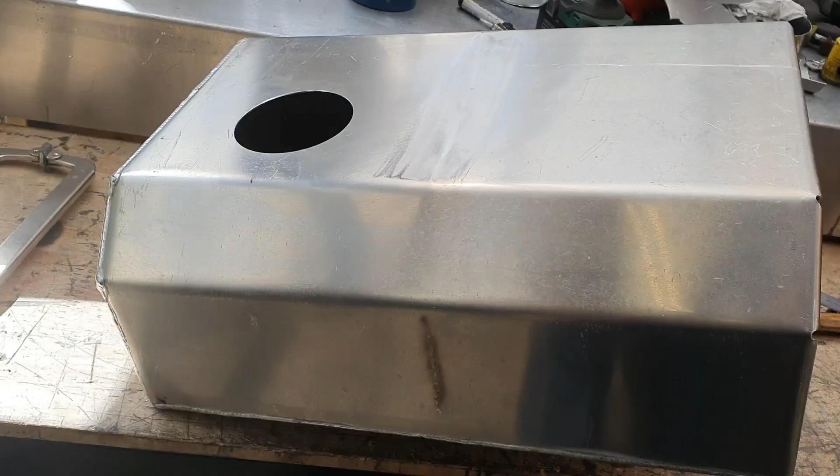This morning we're still working on that fuel tank I was making for this thing here. I'll show you where I'm up to. Some funny marks on the outside - why? Oh, because I welded something from the inside.

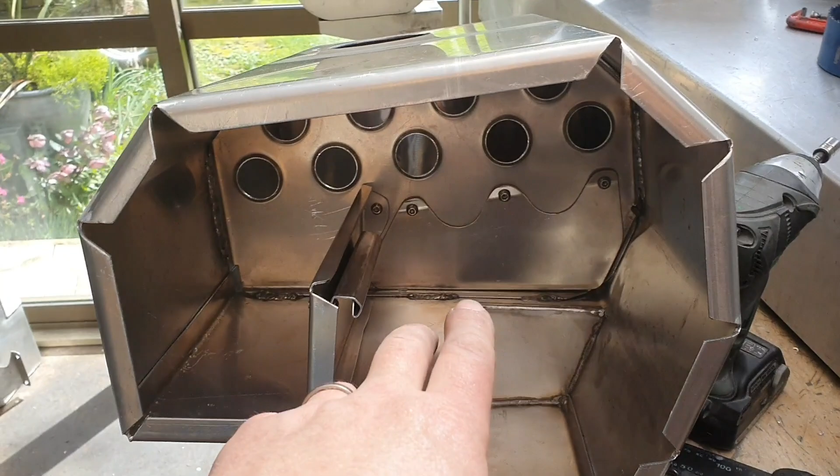Baffles - only two really. This is our main baffle, which is the one I showed you in the previous video, with our little one-way valve arrangement here, which some people say will never seal properly. It's not designed to, okay? I don't expect that to seal 100%. That's just for the bulk of the fuel that's sloshing around. It'll do a reasonable, effective job.

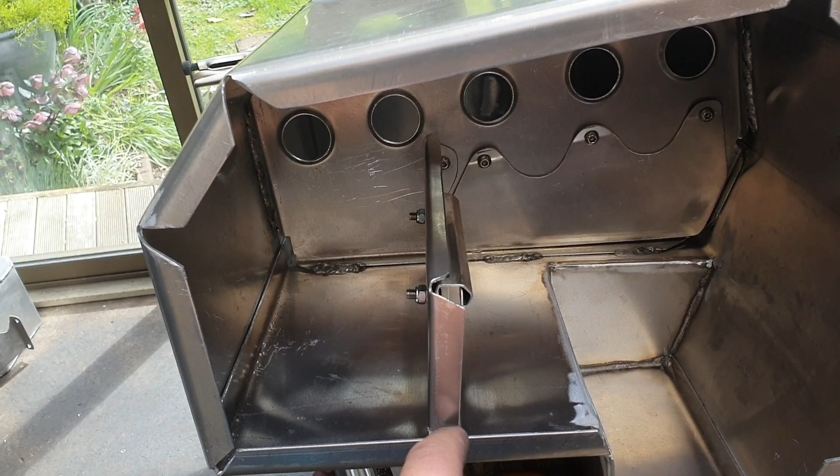Same deal with this one here. This baffle is actually on an angle. When that goes in the car, it's actually leaning back, so the top of it is behind the bottom of it, and the reason for that is any fuel that's in here under braking, I want to try and minimize how much can slosh out.

So we might have that much fuel in there under quite hard braking, so we've still got some for the surge tank here. And then I wanted a check valve on that one as well, just to try and catch what's in here, what does go over there. I want it to get back to there as quick as possible.

So I built a check valve with a counterbalance on it, so it will stay closed when we want it to. Because if we didn't have a counterbalance on there, it would want to hang straight down, which wouldn't seal. And of course, if we just folded that out flat, then when the fuel comes up here it's going to push against that and push it open. So I reduced this by folding it around, so we've still got the weight we need with minimal surface area up here.

I mean, you can do that sort of thing with rubber flaps as well. They'll work far more efficiently, and you can seal the corners and everything a lot better than what I've done and get a better result. Or you could just have - one suggestion was - 4 fuel pumps and run them into a surge tank and take a main pump from there, or 2 main pumps from there. But heck, I want to try and keep things simple, as maintenance free as possible, and keep the costs down and keep it light.

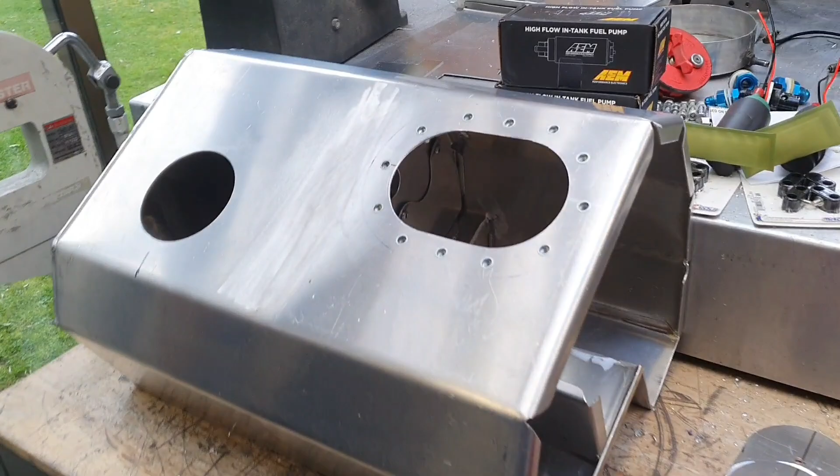It's getting a bit late in the day. Not sure I'll get too much more progress done on this today. So,

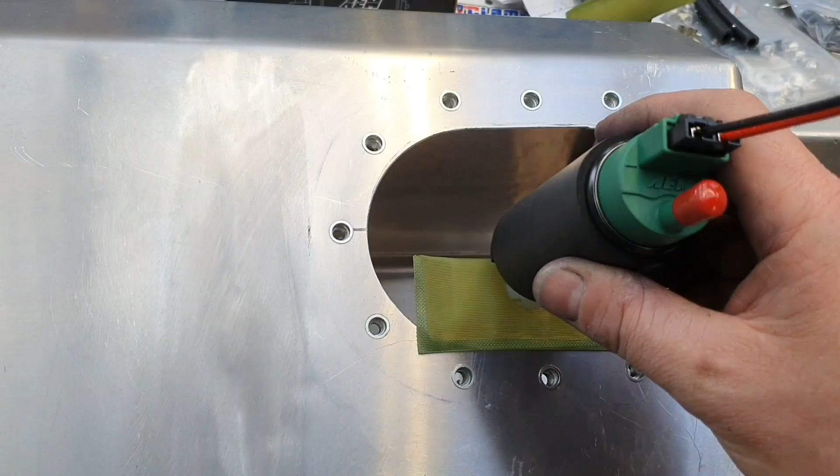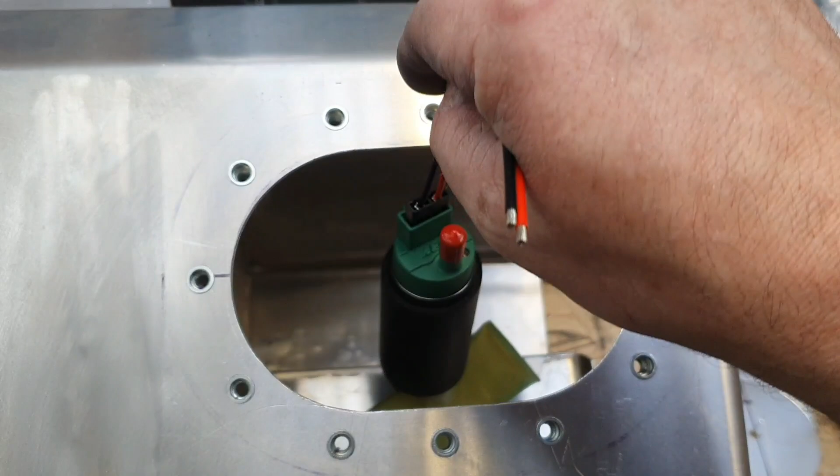There's a few options - spend some money or make some things. You shouldn't pick up things like that by the wires, but these pumps don't weigh very much so that's okay. Popped down the road and got some 4mm thick aluminium.

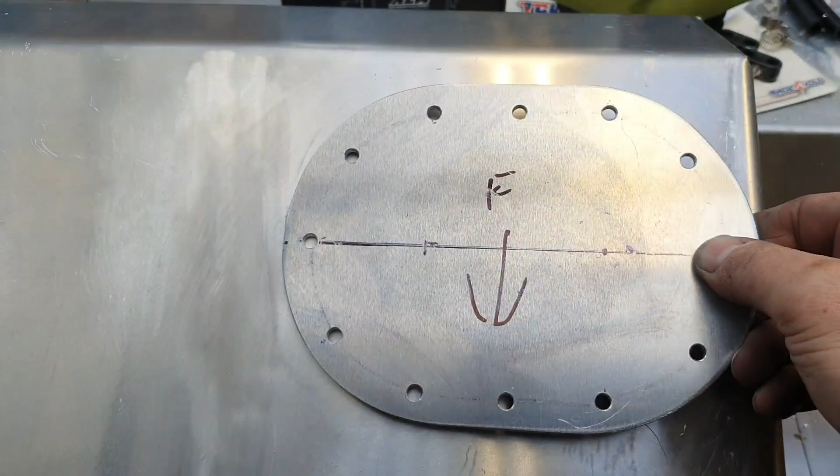So if we put that on there like that and did some screws up, that would absolutely leak like a sieve - there would be fuel everywhere. If we put some fuel-proof sealant on here, might be okay. What I'm going to do is use a gasket.

Because I've used rivnuts or nutserts or whatever people want to call them, the fuel is going to get to the thread and come up the thread past the screw, and come out under the screw hole. So what you have to do is put a fiber washer under the head of the screws, although I'm thinking I might want to run countersunk screws on there.

So that kind of sorts out that plan. We might have to pop an O-ring in the top of the nutsert and do it that way, and that'll work. That'll be enough, or use fuel-proof grease in the nutsert - that'll absolutely work fine.

I've got to figure out where I'm going to put our fittings to get fuel out of here. I haven't got them over here so I can't show you right now. I'm going to put the fuel filters up here - well, that's what I'm thinking. I need to make sure they actually fit. They might not go there, they might go on the panel over here, and I can't show you because it's up there.

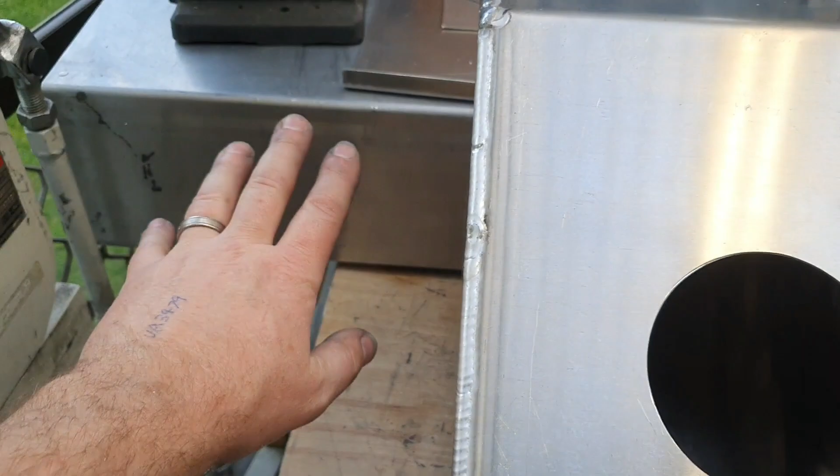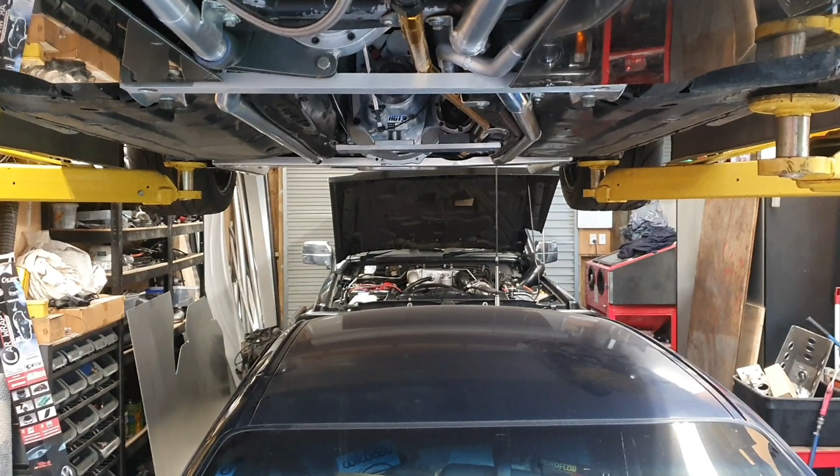Progress report on the patrol - I've sorted that, I've rebuilt the master cylinder. Funny, you can see the master cylinder from here, can't you? A big white thing right in the middle of your screen back there. So I rebuilt the original factory master cylinder and we're good as gold. That's resolved, it's all working. What a hassle, but never mind, it happens.

It says 3 o'clock, but honestly it's dark and gloomy like it's 4 o'clock. I might get more done than what I said I would.

I'll make some brackets and stuff. Let's do the bracket first. We figure out where the bracket goes to hold the pumps, because the fuel fittings can go almost anywhere, whereas the bracket's going to be quite specific and have to do something quite funky. It's going to have to start here somewhere and work its way a long way down to our little sump down there.

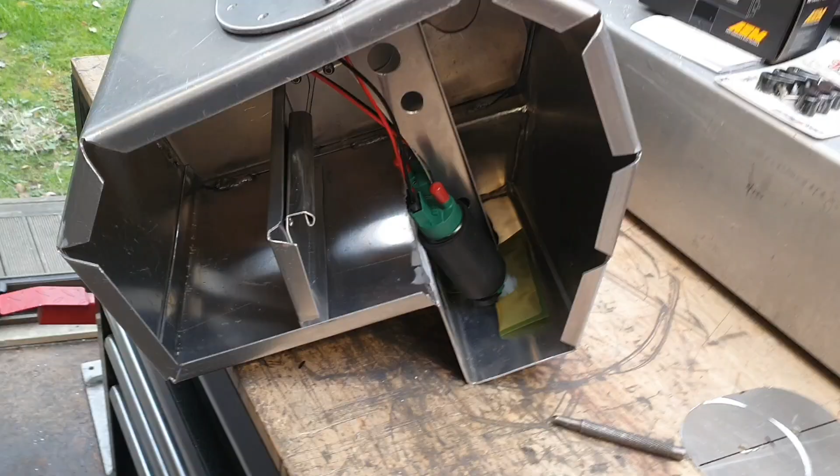You liar! I just said a couple of seconds ago in the previous clip that it feels a bit later than that. It's 4 o'clock - that's running an hour late. Liar, liar.

That's the basics for the bracket, kind of sorted out. I have just bolted that on there. They will have fibre washers under there to seal them, or I'll just do them up and the aluminium will basically crush and make its own seal. The other side will, not so much, with the 4mm thick panel there.

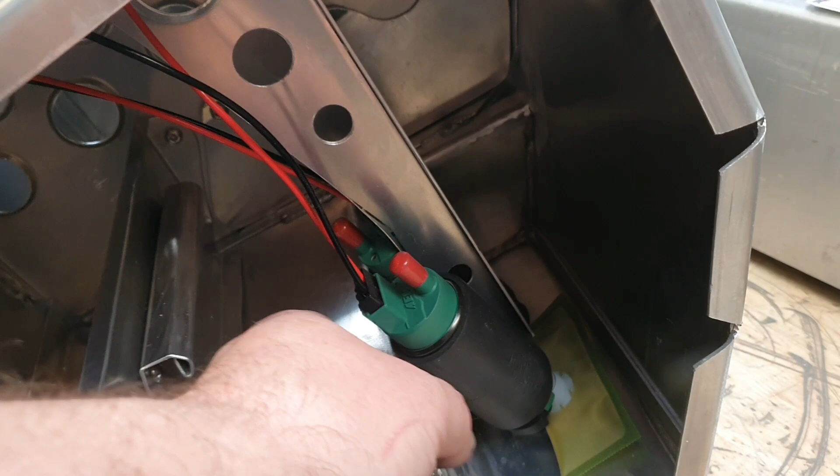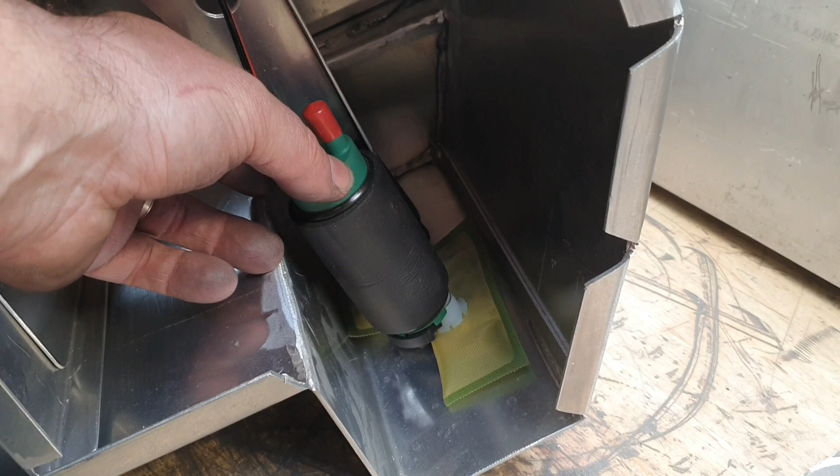Yep, you could make a fancy bracket to hold that on there - you absolutely could and there's no reason why you shouldn't. I'm just going to use cable ties, because realistically that's all we need to do. It just needs to be secured so it doesn't wander off or fall off, and needs to hold it there so when you take that panel off it comes out with it.

The next thing we need to do is - I'm not going to put the cable ties on those right now - I'll hold those just ever so slightly up off the bottom of the tank so they don't chafe a hole through the bottom. But honestly, it's never going to happen anyway - it's 2mm thick, it would have maintenance before that would be an issue.

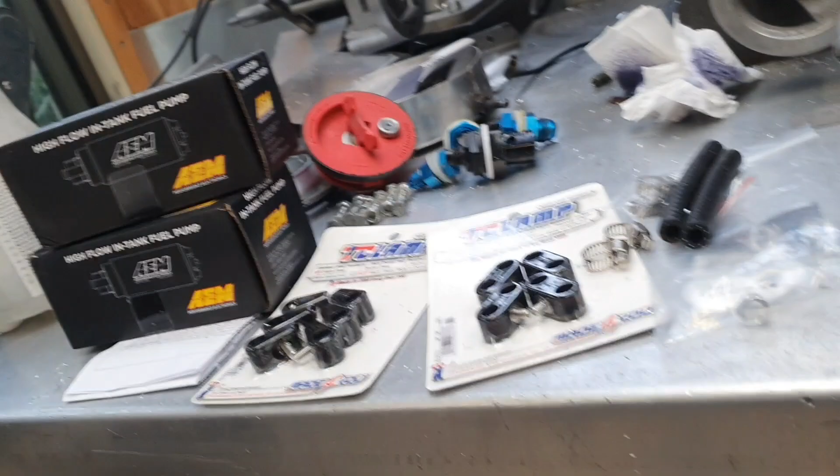The next thing we need to resolve is getting the fuel from here out here. The in-tank hose - you can't use any old fuel hose, it has to be special in-tank hose. The in-tank hose supplied with the pump is a bit short on one end, so that's no good. You can buy that, there's various different brands available.

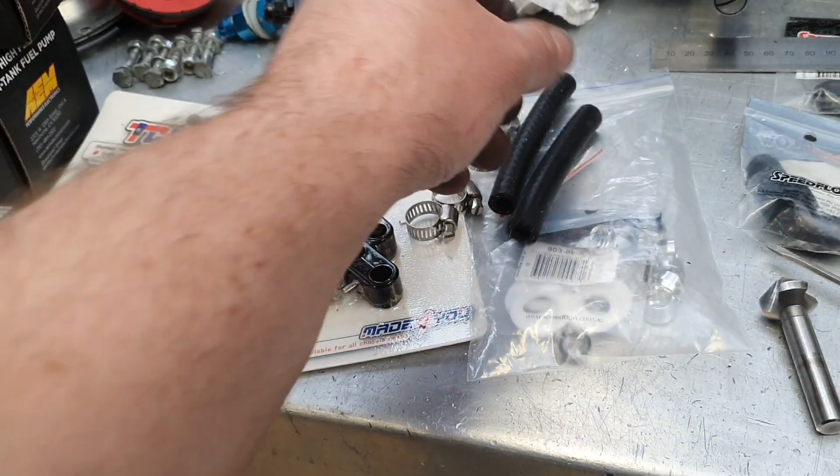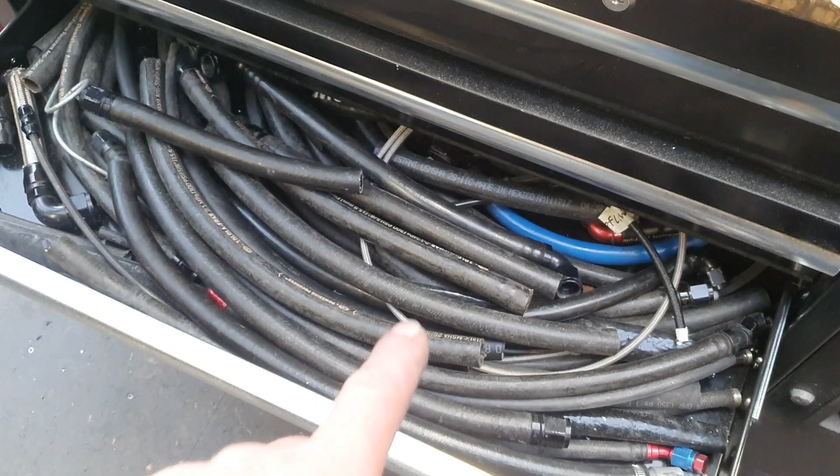It's very expensive, and it's actually cheaper for me to go into my drawer of lots of things and find some hoses we can use and make an adapter to go onto the end of the fuel pump. Just go AN 200 series hose up to our bulkhead fittings on this tank - much better and safer and more gooderer. So we'll do that. Don't use push lock hoses on E85.

No, no, no, no. Bad, bad, bad, bad, bad, bad. It's 5:30 now, I better get a wriggle on.

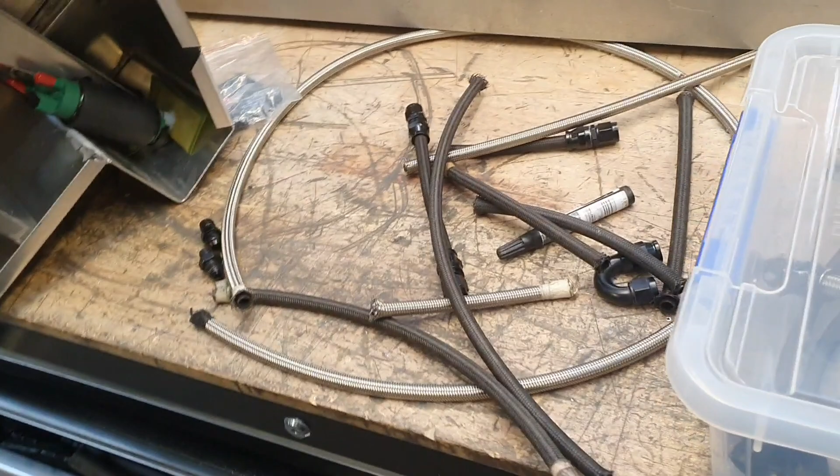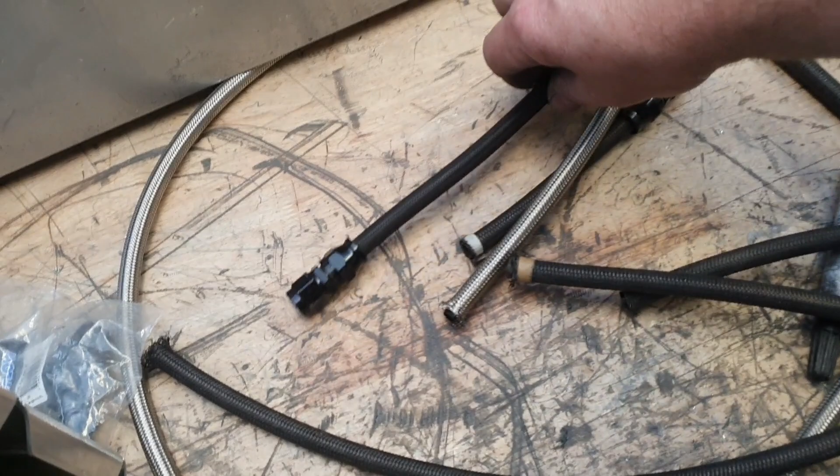So I found those bits, they were on the shelf. We're one hose end short of having enough to do what I want to do - just using stuff that was lying around. So we've got, that is probably just about the perfect length actually. Oh, sorry, terrible camera work here.

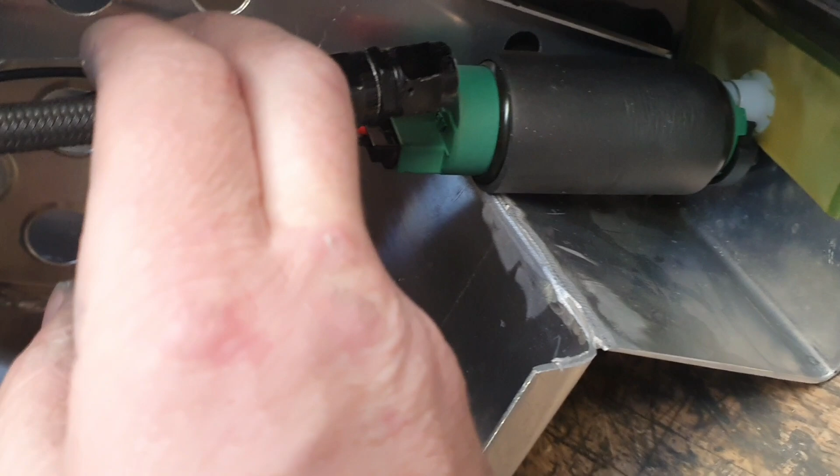By the time we have something on the end of there, and that goes up to there, that has the potential to use just like that. Put an olive in the end of there, put a fitting on there, and we'll be away. That one's going to be a bit long, so we can take that off, put a new olive in it, shorten it up, put a new olive, and be good to go.

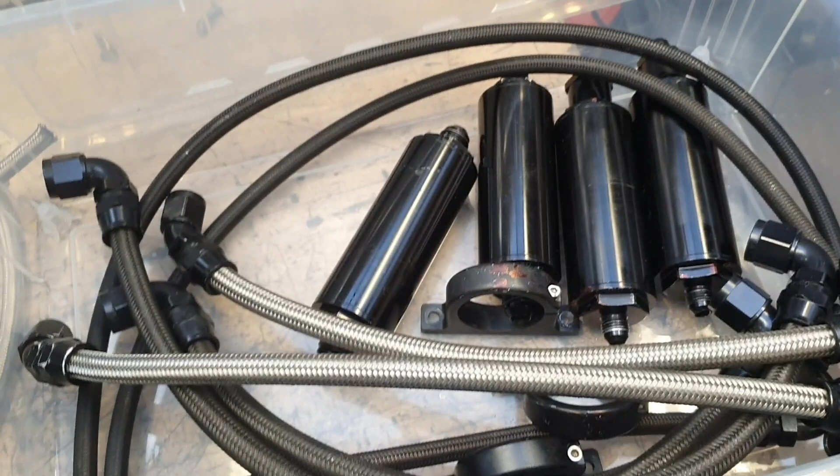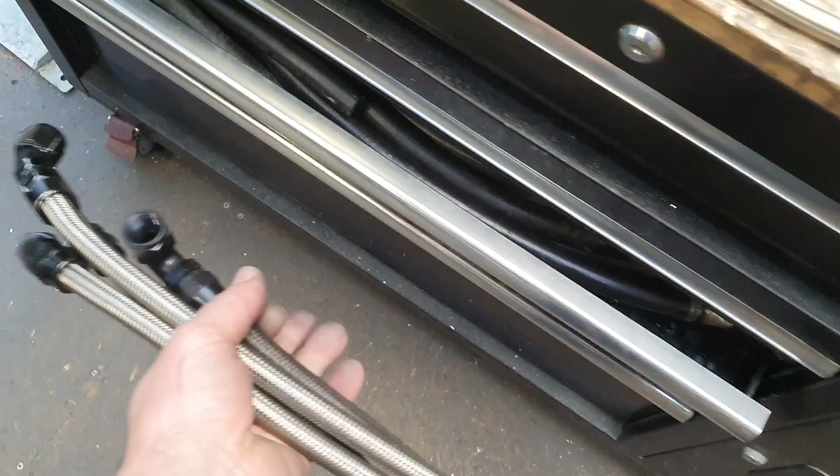Not that we need black hoses inside the fuel tank - there's plenty of brand new, not black hose. And here's, well, most of, I guess you'd say, the original fuel system. These are AN8 hoses, which we will no longer require, so we can throw those - I guess we can put them in this drawer here, which is overflowing. That's never going to close now, so there you go.

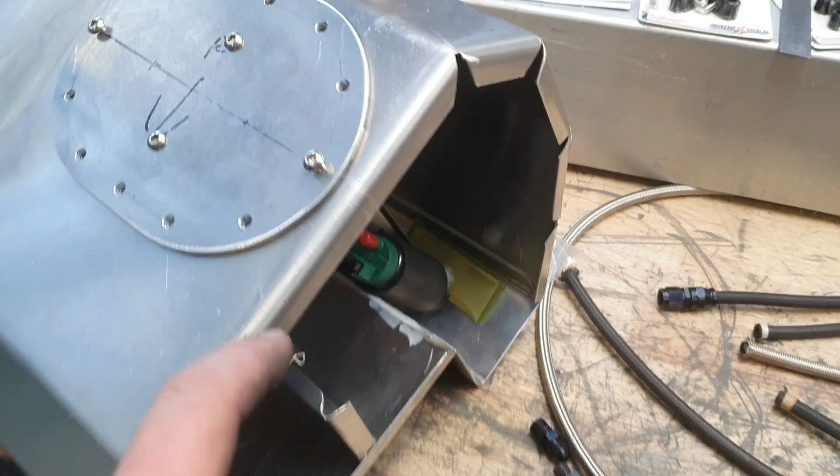And these ones here, we're going to need a couple of hoses to go from the top of this panel, wherever I put the fittings. Might as well put them over this side and have them pointing that general direction. Going to need a couple of hoses to go from here, wherever the filters are going to end up.

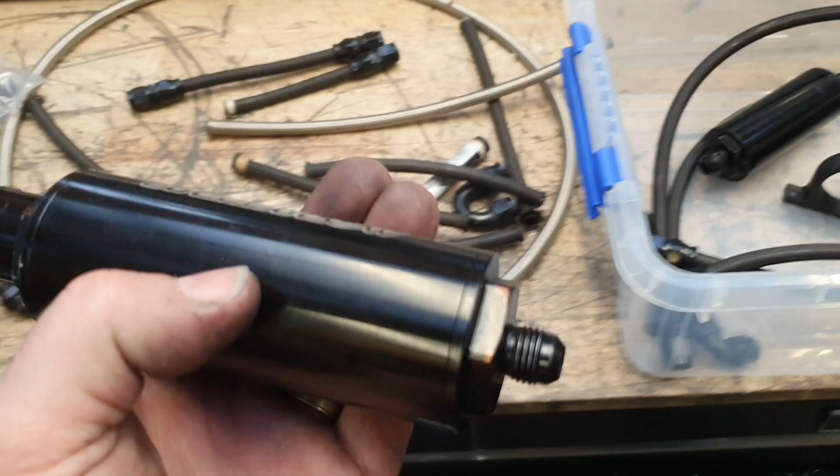Not those ones, those are the primaries. There they are, secondary filters. Which way is the check valve on that? Flow goes towards us.

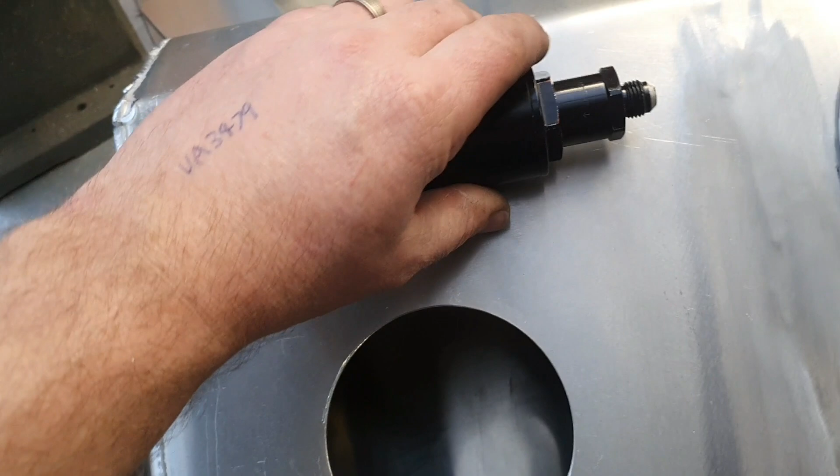They might be a bit big to put up there. Can't put them there. We'll put them down here on this panel that's down here. That way, maybe two of them side by side like that. That'll be nice.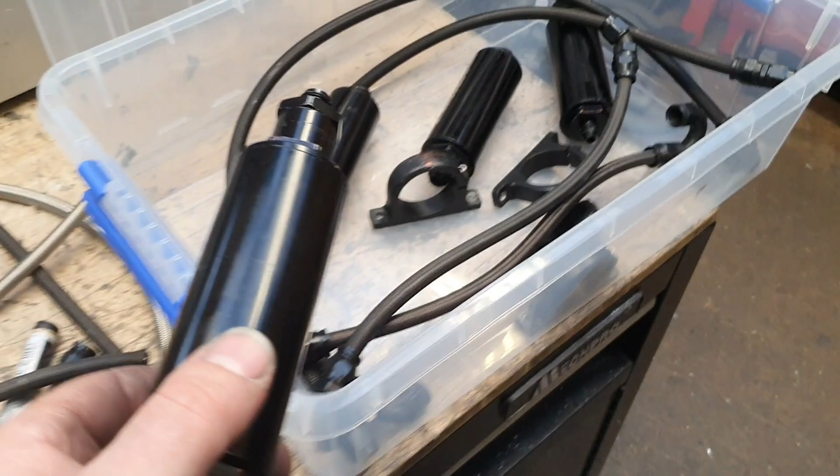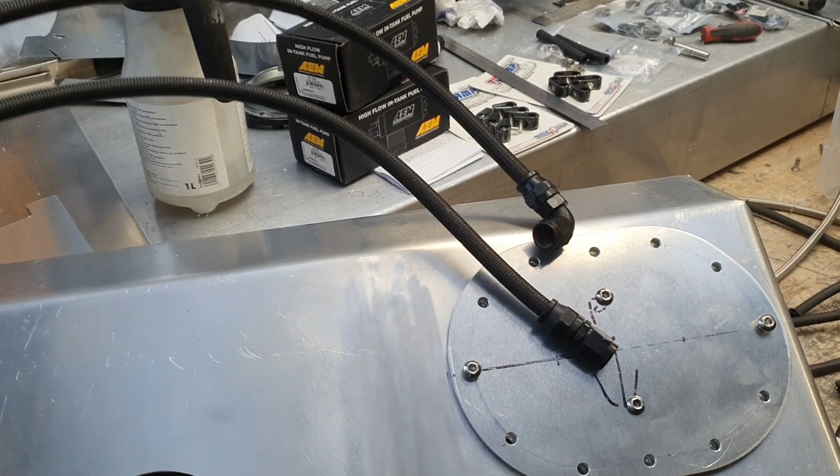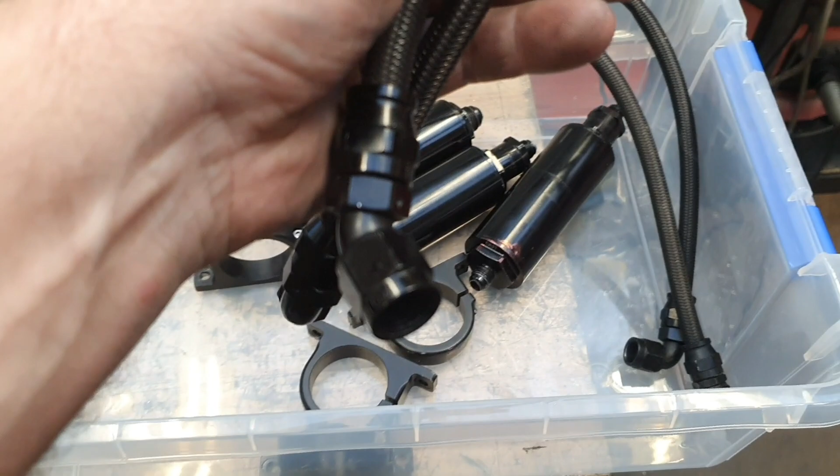Yeah, they're long enough to do that. That's good, that means one of those. Oh, all I wanted was a straight hose end to make it easy, but we don't have. Got a couple of 45s. That'll work, straights on the bottom there, 45s up here where these two fittings are.

Hose clamps and whatever, cable ties, whatever, to hold it to our bracket here. Good as gold, and that will actually steady this big bracket up, because the 200 series hose is pretty stiff, the pumps are pretty light, they'll hold themselves.

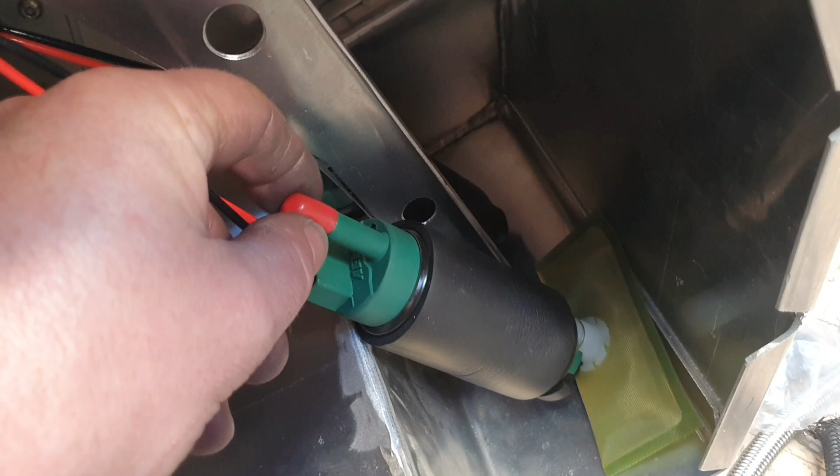Now, someone suggested what I can do to convert these from just a straight hose barb. You'd barely call it a barb actually, because trying to do this with one hand would be difficult. There we go. So they have no grippy things at all, little one-way teethy holdy hosey things, none of those. I'm never going to be able to put that back on with one hand.

Someone said that you can get some of these and drill them out, glue them on there. Well, that would potentially work if you've got absolute faith in the glue. The original recommendation actually was an aluminium weld-on fitting, which does have a nut on there. But that's quite risky, because as you tighten that up, you're going to bust off your glue.

So I could do that, I could drill that out, slip it onto there. It's like 9.13 or something, that plastic. So drill it out to 9 and press it on with some glue.

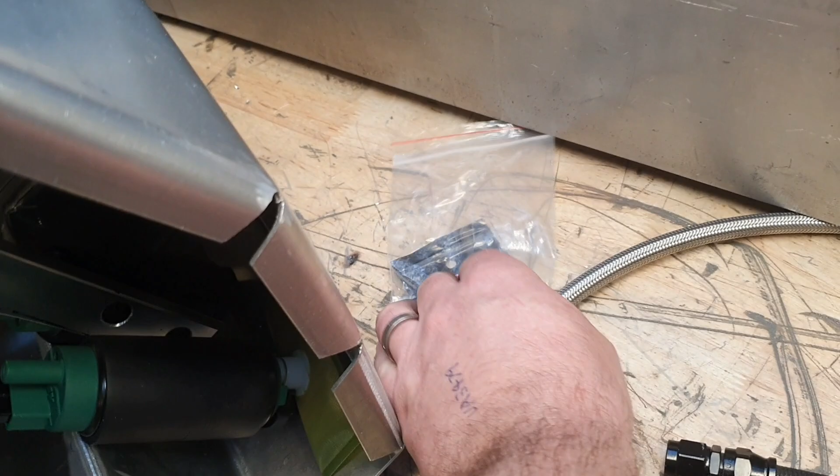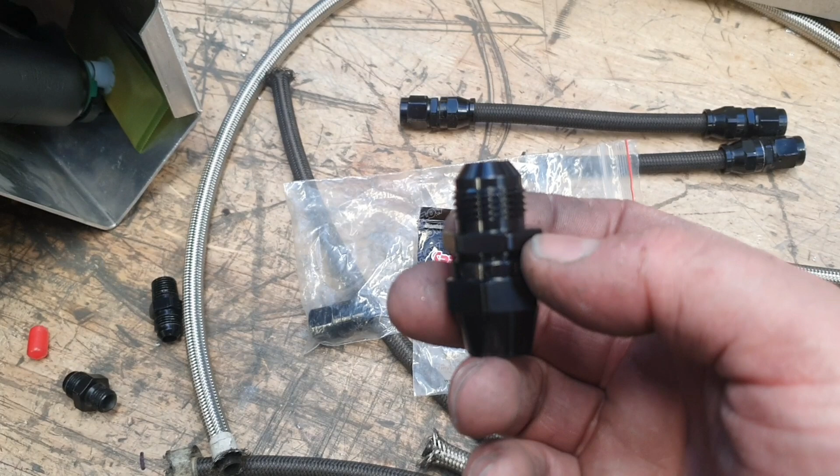That would work. The other one is, I don't know if you can see that in there. You probably can't. Hang on, the tube adapter. So what we've got there is, this is the wrong size by the way, this is 1/2 inch and it's AN8. We need AN6, and we need, I don't know what size that is, 7/16 or whatever it is, 8mm, 9.13.

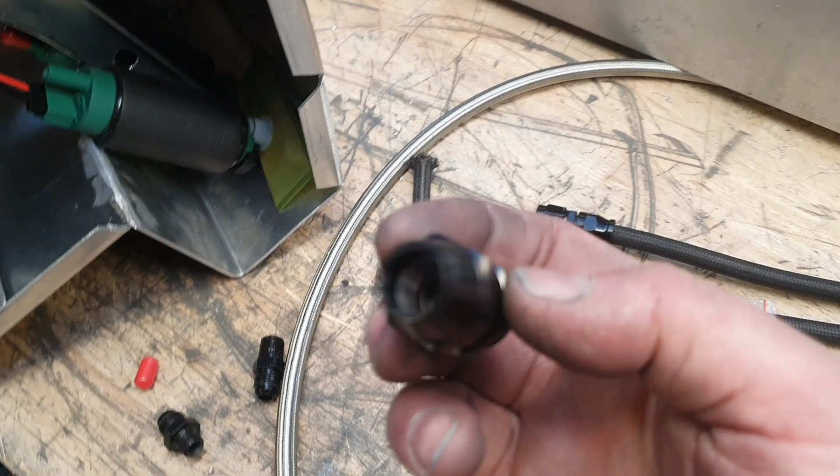Or whatever it is. What they have in there is an olive, you can see the shiny little olive inside there. So when you do this nut up here, this one that I'm turning, when you do that up, it crushes that olive onto a tube, which, if it was the right size, would be that tube, and you do that up, and that won't come off, and we won't need any glue, and it'll be awesome. So I might see about getting a couple of those, and then we can have our hoses go from there to wherever, and that'll be good.

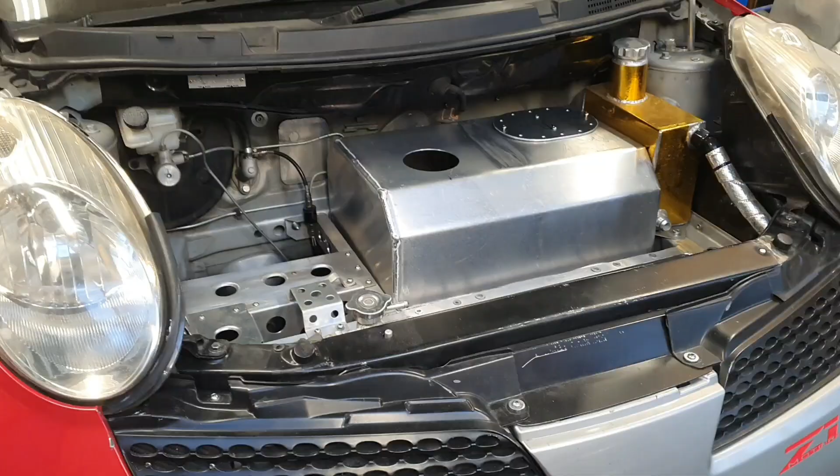Just to make thinking easier, mock it up again. So there'll be 2 of those. I'm going to build a bracket that sits them right there, 1, 2.

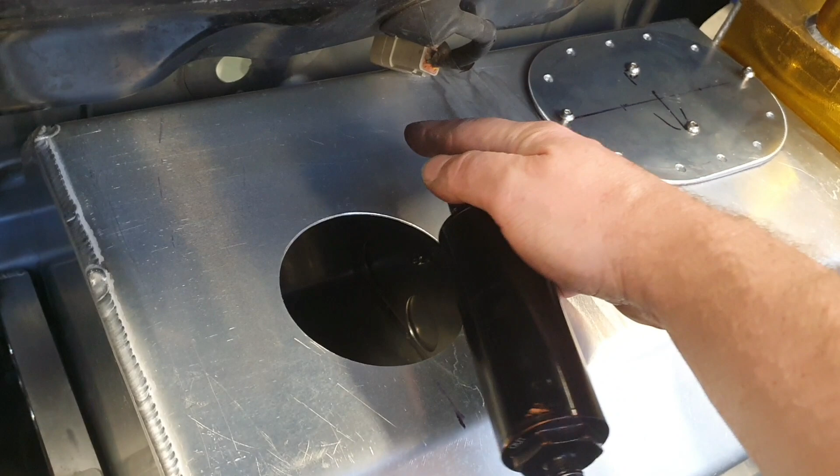And then we can go 90 degrees hose end from there, and across to there. 1, 2. And I'll even put a little bracket on here to put a couple of hose holders. That's what I'll do.

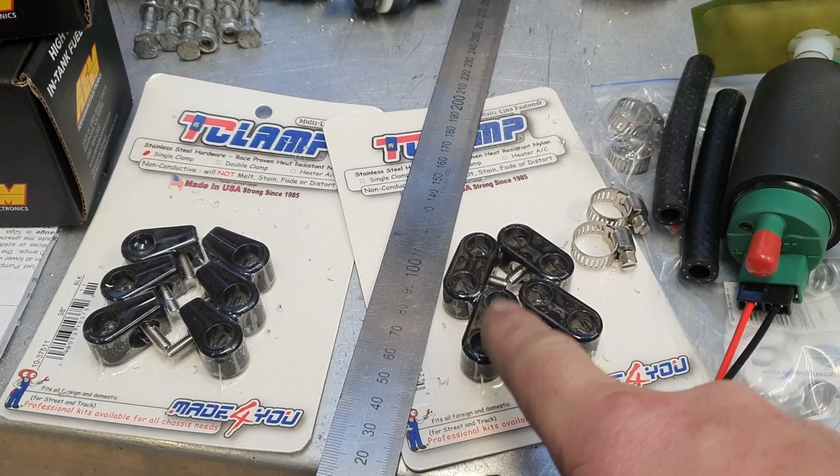1 or 2 of those and make up my mind. Then I have to buy some more for underneath the car.

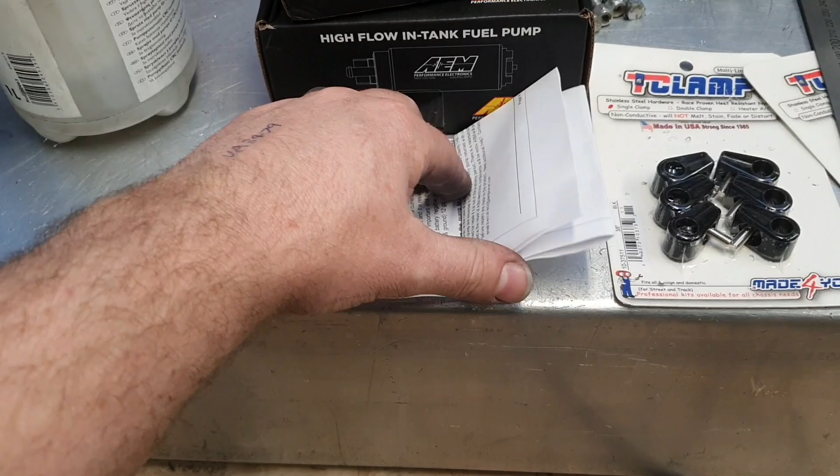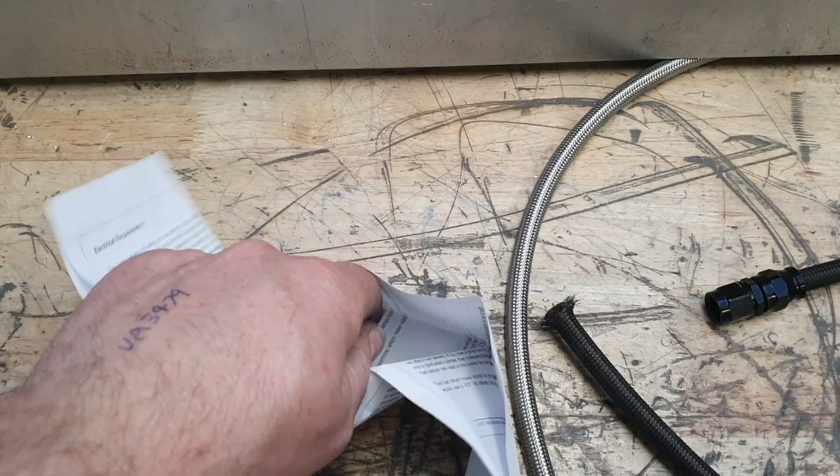Now, something I didn't talk about, but I did read and do know, is in the instructions for these here, they talk about what size fuel hoses you need.

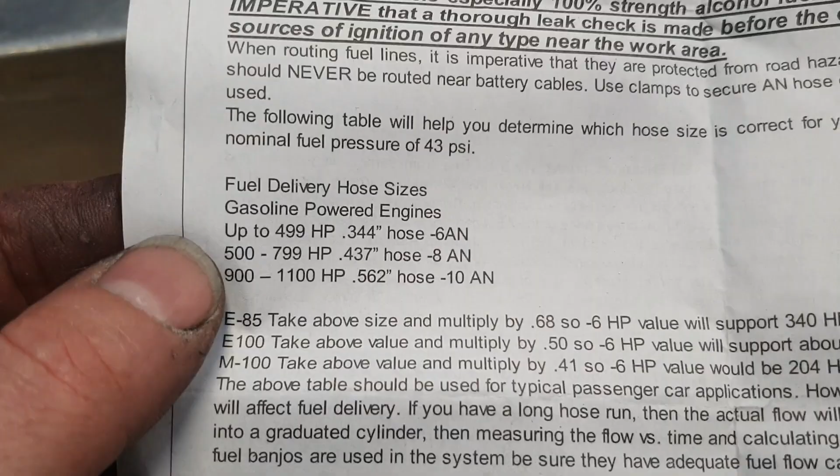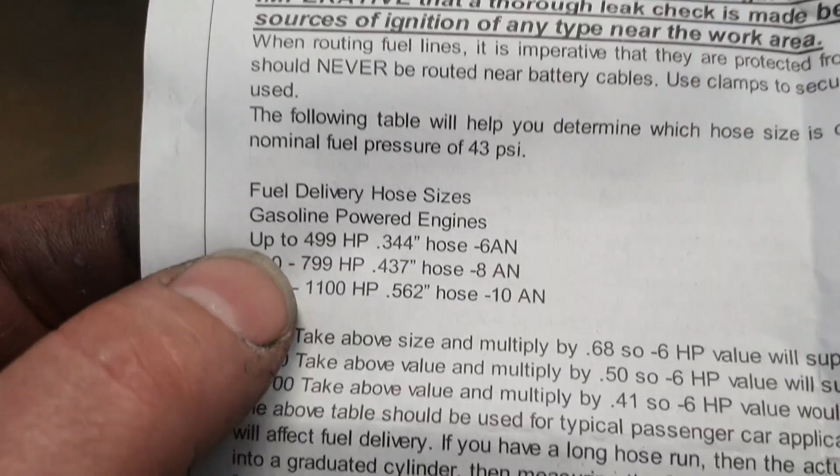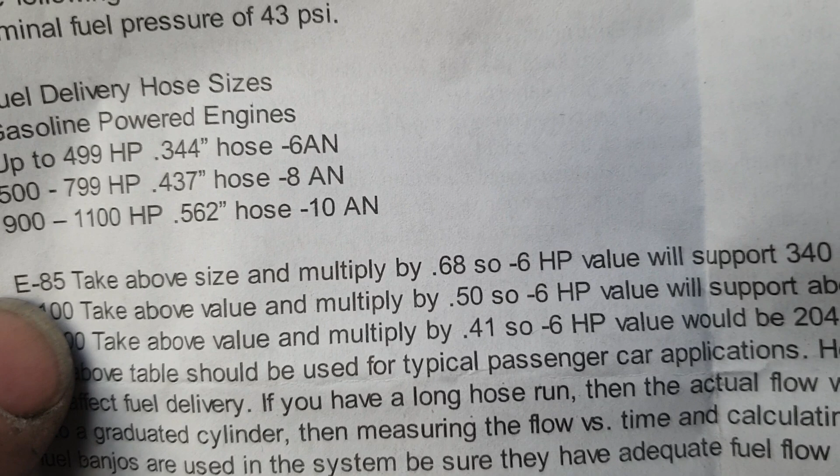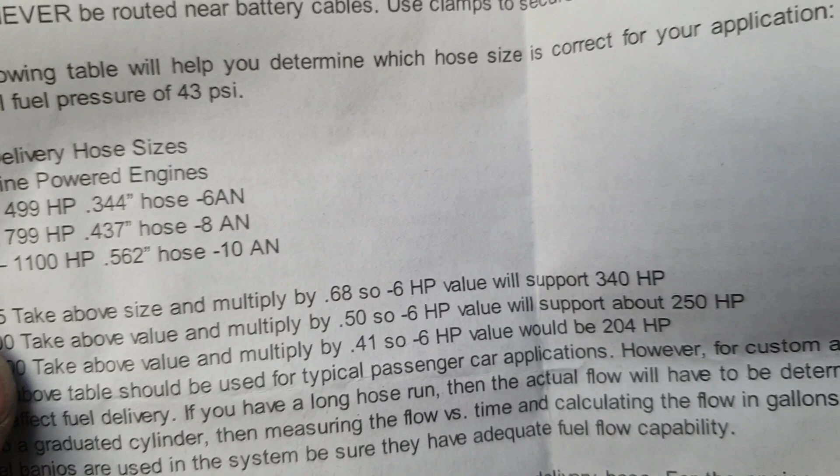So we've got 2 systems that are -6. So you would think, looking at that, woohoo, we've got 1,000 horsepower worth of fuel. Sorry about the flickering lights, but E85 size multiplied by 0.68, so -6 hose will support 340 horsepower. So they reckon I've got enough for 680 horsepower worth of fuel.

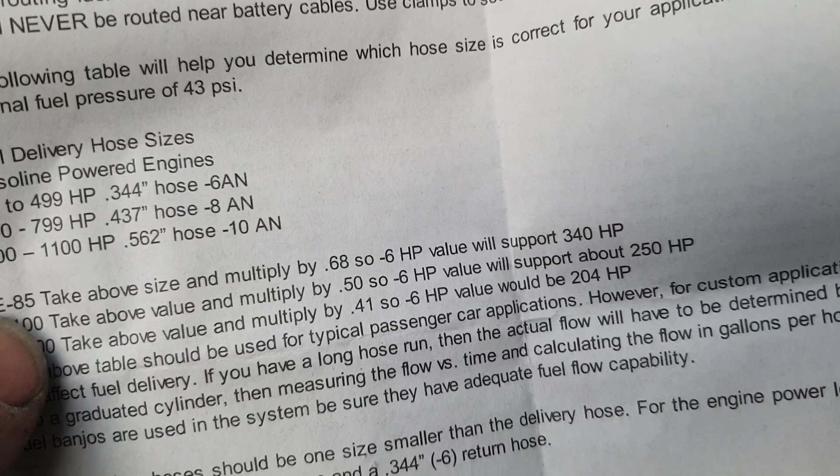Meh, there'll be a margin of error, won't there? We'll be alright, 700. We're going for 700. Why not? That'll be fine.

So I'm not sure where they've got their guidelines from, I'm assuming they've read something somewhere. There's always a lot of talk about what size fuel hoses you need for what size horsepower, and a lot of people go way too far.

Like the Gloria with AN10 hose for 400 kilowatts was ridiculous. You can do 400 kilowatts on AN6, I guarantee it. I know you can safely on 98, not on the 85. Much more than 400 kilowatts, you go to 8. We've got, like I say, we've got 2 lots of -6.

Will you be quiet, Mr. Hoist? Stop creaking and groaning in the background there.

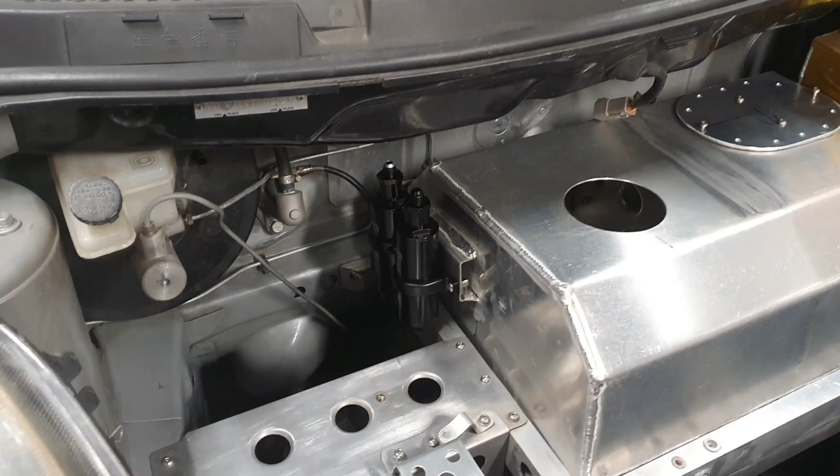Hey look, it's only 20 to 5. We can keep working. It's after 6. It's after 6, the clock's lying. There, I'm really late for going and getting the dinner.

But that is basically where I am going to put those. Yay, so fuel hoses from there to there, down to there, and then to the back of the car.